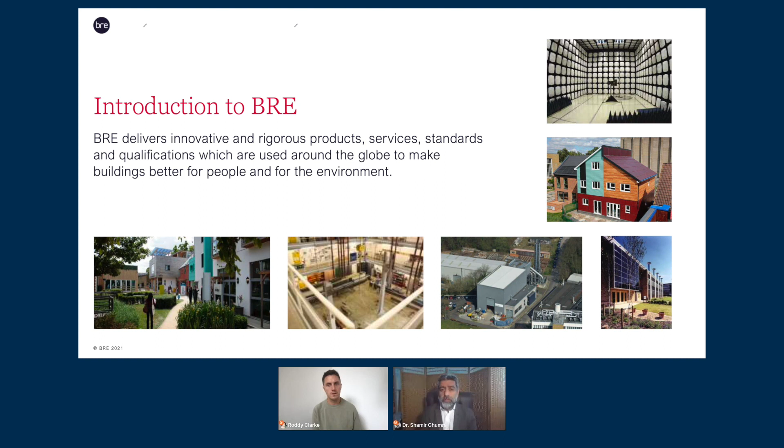I think it's that interconnectivity of a whole range of sustainability issues that's given BREEAM the strength, the recognition, and the adoption that we see around the world, both for new construction and increasingly for the new existing building schemes that we operate as well. But a bit more about that later.

I really want to touch upon two key themes that I think are vital for us to understand as we unpack this conversation: the aspect of time and the essence that clearly we are running out of it. Therefore, the closer we get to some of these milestone dates, 2030, 2040, 2050, or whatever it might be, actually that sense of urgency really starts to dawn.

Nor do we want to panic in a sense, that we want to create a lot of anxiety. But actually we need to channel that energy and that desire for change and transformation in the built environment in such a way that it gives us more confidence, belief that these goals are achievable, and we have the right tools at our disposal today.

But perhaps what we do need is scale. Wider adoption of some of the things you'll hear about from other speakers, fantastic examples of circularity, innovation around products and what those can achieve. We're blessed with so much talent in our industry, but now is the time to really mobilize that and scale, to adopt, to change the way we procure things, to change the way we do things, because fundamentally the road is getting shorter, and our sense of action is ever going to become more acute.

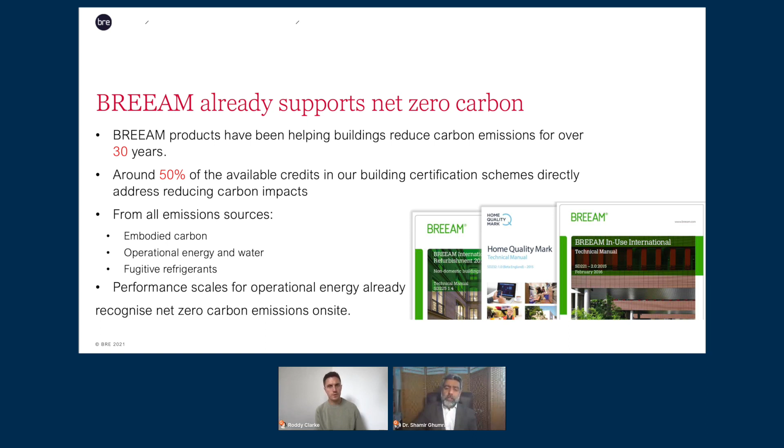And I'm pleased to say that was a sector that really did take some leadership and demonstrated that you can declare with confidence the environmental impact of some of these products, which I'm sure you'll hear a bit more about later on. So hopefully I've painted a bit of a landscape there for everybody to show that there's a huge opportunity that lies ahead of us, lots of tools and systems that exist.

But I do think it's important that we understand, raise our carbon literacy, I would suggest, and therefore be able to utilize data, look at the time horizons that we've got to work with, and really make some of these more strategic decisions today.

I think it's absolutely fundamental for us to make sure we achieve these global goals that we have no choice but to absolutely deliver on.

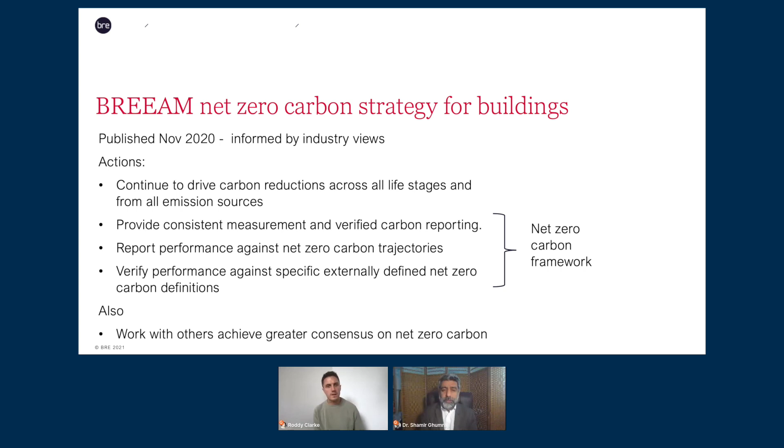So Roddy, back to you. Thank you very much, that's really interesting, and it's really good to see the role that schemes such as BREEAM can play in helping the shift towards a climate conscious future. I think the specifics of the certification, how it takes into account each component that goes into a project, is really interesting. Just maybe if you could give us a quick insight - you speak about time and the urgency of time - what do you think, in your view, are the biggest obstacles in reaching these targets?

Yeah, and I think it's a challenge, isn't it? We've got some great examples of leadership with organisations making massive strides around setting ambitious goals, not waiting for 2050. I think the hesitancy in trying to push things out further and further does create a lag, does create apathy in some cases, where actually, well, we've got time. Maybe 28 years for some is a long time, but actually in the time that remains ahead of us to make significant change, we need organisations to be more ambitious, to bring these dates forward, to talk about 2030, to talk about 2040 particularly, because by the time we get to these milestone points and we evaluate what we've done, and looking at that gap, if our realisation is that the gap still remains too big, our opportunities for intervention will get incredibly small, and that's the challenge.

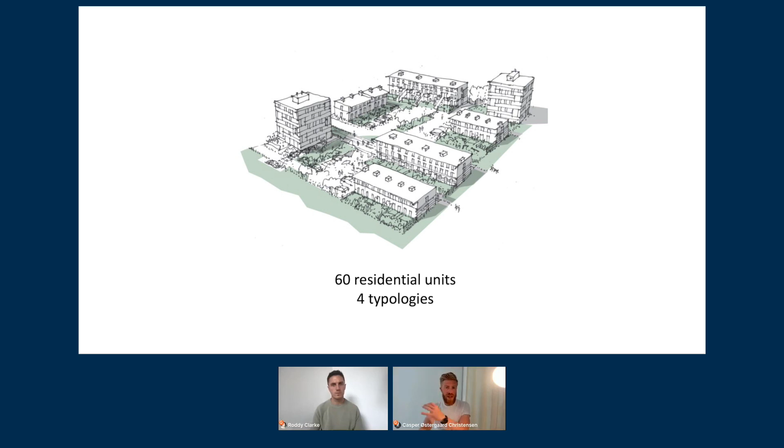The project we've designed is a social housing project with 60 housing units, split over 4 different typologies to show variety and flexibility in the building system. So it's not just one type of housing, but multiple. It's built in concrete, which in itself is not very close to zero carbon, but we can't avoid using it, so we wanted to push that agenda as well.

That was basically one of the key points from our client here. Right now they're spending a lot of resources adapting apartments from the 60s and 70s made in concrete to current needs, since people need larger apartments now than they did back then. So they see a huge value in that.

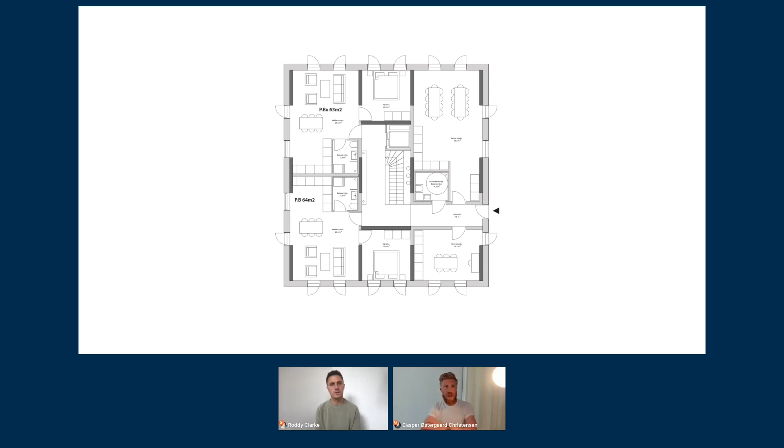If we can avoid spending resources and creating building waste by having more flexible apartments, that also lowers the carbon footprint over the total life cycle of a building. We'll just flip through here - here's the same footprint, but another set of apartments in the block. You can kind of see the building system here, the repetition of these concrete walls.

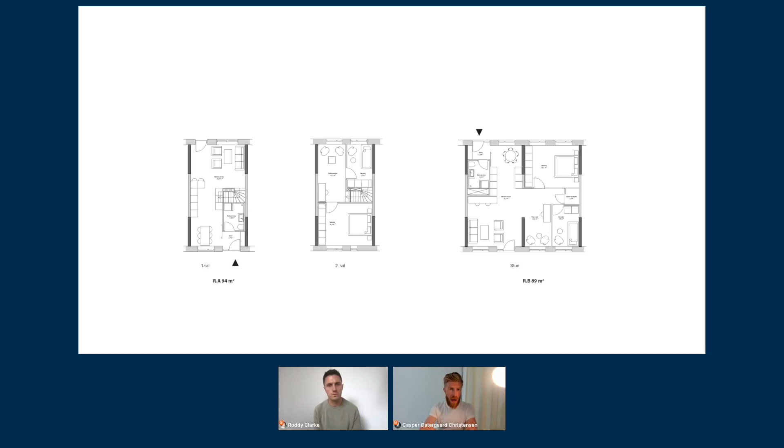And here we move to the row houses - see, it's the same building system. You have a set of concrete walls that are then repeated only once. The last typology here is where you have 2 wide apartments next to each other, and then a row house on top. But again, you can see it's the same building system, just a variety of it.

That's also the thinking here - if we are to reuse the building materials as they are in the future, they need to be alike, and they don't need to have a lot of specific openings and windows and all that. So it's very simple elements that you can use in multiple ways.

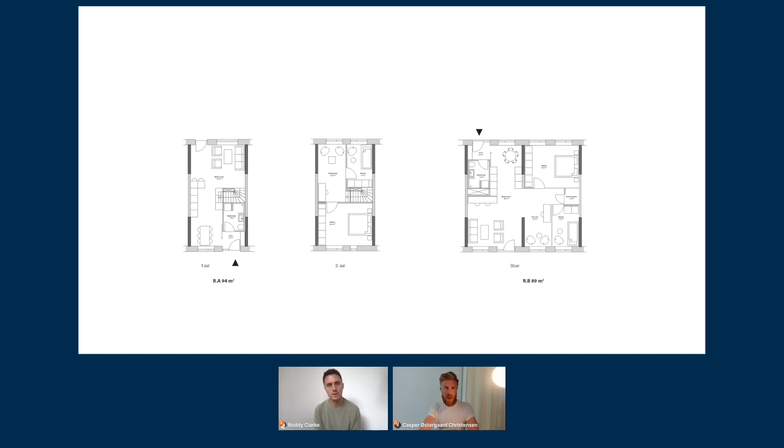On top of that, we also pumped it with a lot of different circular building materials to show off to the industry, to say, hey, it's actually possible to go out there right now and get materials that you can use to have a circular building project.

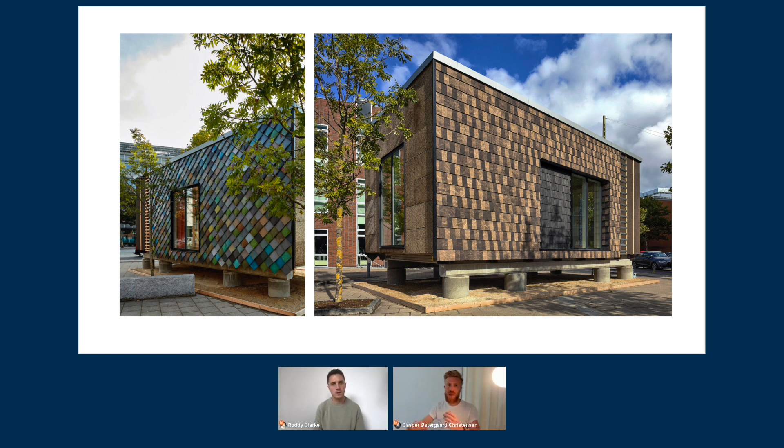And yeah, that's also from the outside - we just clad it in a lot of different circular materials. The very colored one here is made from recycled consumer plastics made into facade. On the back side we have cork. And here's a design for disassembly shingle facade.

Yeah, so that's the Circle House project, explained very quickly. Again, it's social housing, so it's a very low price, and right now the larger project is under construction. That's one of our lighthouse projects that's really paved the way for a lot of the work we're doing at the moment on larger projects. Just getting something built and showing the industry that this is possible is a really good step, and also something to push the agenda. So I really encourage people to just get something built, as an example.

Thank you, Casper. Yeah, that's really interesting, and it gives us such a great insight into the specific approach that you took for this project and how it is possible to bridge that gap. And as you said earlier, embarking on a circular building project doesn't always have to be a cost implication. It can be about innovating around that.

And obviously in all of your projects, how do you monitor the carbon footprint of each product individually? Often we of course use specific programs like One-Click LCA, or there's also a specific Danish program to monitor carbon footprint. And sometimes there's just generic data, but what we really like is when we get EPDs, for example, where the manufacturer has reviewed their own product and can give us specific numbers on how this product affects it. It's something we're looking more and more into.

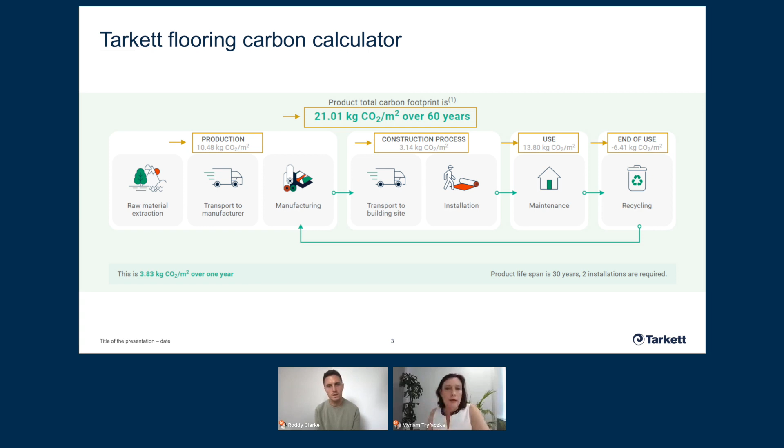So here they understand that the carbon footprint is 21 kilograms of CO2 per square meter over 60 years. Of course, what does it really represent? What we have done is calculate the equivalent of those tons of CO2 avoided in something more concrete. So we choose numbers like equivalent flights, equivalent trees keeping carbon, and that should help our customers have some references on what really brings a positive impact when choosing the carbon calculator.

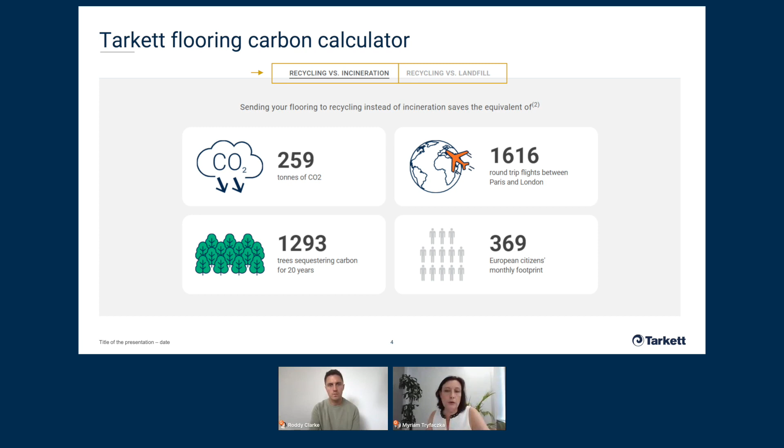Amazing. And this is what I mentioned earlier about taking accountability—you really are taking accountability and making it easy for customers to invest in products where the data is there.

And I think also you mentioned it briefly earlier about the Restart program. That would be really interesting to hear about, and how you've salvaged tiles from construction sites around the globe.

So I will not describe the full detail, but let's go immediately into a true story and what we can deliver to our customers today. A few years ago, we developed the possibility to recycle post-use homogeneous flooring. This happens in our factory in Sweden, and it was natural to collaborate with a Swedish company at that time that is as well really motivated by the circular economy.

And we did it with IKEA. IKEA has been using Tarkett floors for many years in their stores, and we had our first experience with IKEA in Kungens Kurva in Sweden, where we were able to recapture 10,000 square meters of used floor covering.

They were brought back to our factory, where they were cleaned from the backing and glue residues, reground into raw materials, and integrated into new production of flooring. So this was a closed loop system.

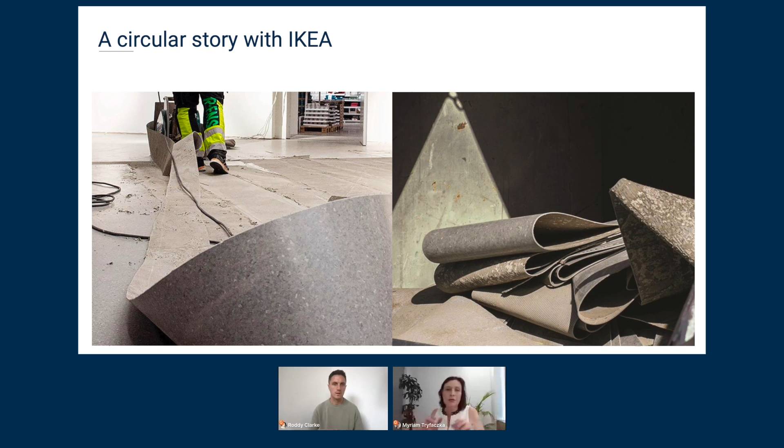Brilliant. Thank you so much, Myriam. That's so helpful and really inspiring to see the change that's already taking place.

It's been really inspiring hearing you all talk about independent projects, individual changes that we can make. But what are your thoughts on the global marketplace as a whole? Is the infrastructure in place to achieve the goals that we've been talking about on a larger scale? Shamir, maybe if we come to you first on that.

Great, and I'd just like to reflect on my co-panelists first of all. It's great to see some wonderful examples of what's possible and has been happening for some time. As Myriam rightly pointed out, Tarkett and others, it didn't happen last week. It's been going on for some time, and I think sometimes it's very easy to lose sight of that. Actually lots of organizations have already been deploying programs like this, have got experience, got track record, have got an evidence base to demonstrate things that can work.

So it's important for people to take that away from the webinar today, that there's a lot that's already there, and many organizations are doing great work. I think that example, particularly around being able to identify the life cycle study period, there we saw 60 years. It's innovation like that that helps people understand, okay, how often do I need to replace my tiles? How's the product designed so I can actually take it back up without it shredding to bits or the glue never coming off? So it is truly a holistic approach, which I think is fundamental to our ability to deliver.